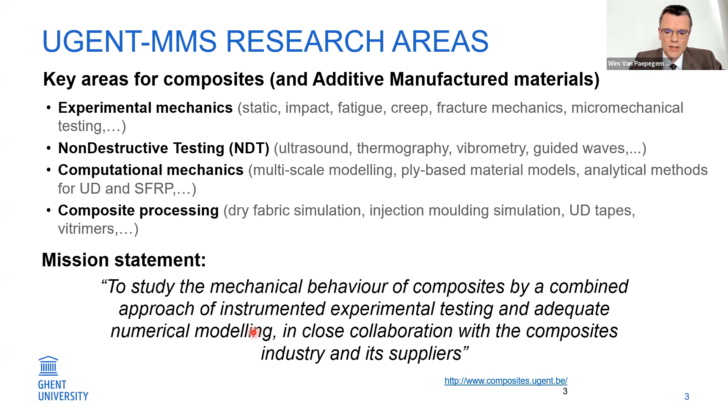So this was just a brief introduction, and now the outline of the webinar today.

First of all, I guess most of you are at least a little bit familiar with composites, so I will give you a short introduction about the multi-scale nature of composites and also their damage phenomena. Then I would like to take you through the story from two different angles, starting once from micro scale and bottom up, and then from macro scale or even structural scale and down. And every time have a bit the same structure: introduce concepts, show some results, and then a few experimental challenges that are linked to it.

Finally, maybe a bit provocative, I put a smiley here: unidirectional is still simple. I want to show you that if you move away from unidirectional composites, like in short fiber and textile composites, the geometry becomes more complex, and that can be an additional challenge if you want to model damage mechanisms.

So first, to start, composites are multi-scale materials. We all know they are made from dry fiber reinforcements combined typically with polymers - that's at least the majority of composite materials. Once it's cured or consolidated, it can look like this, a black plate, which in this case is carbon epoxy. And if you zoom in, we can see either individual layers.

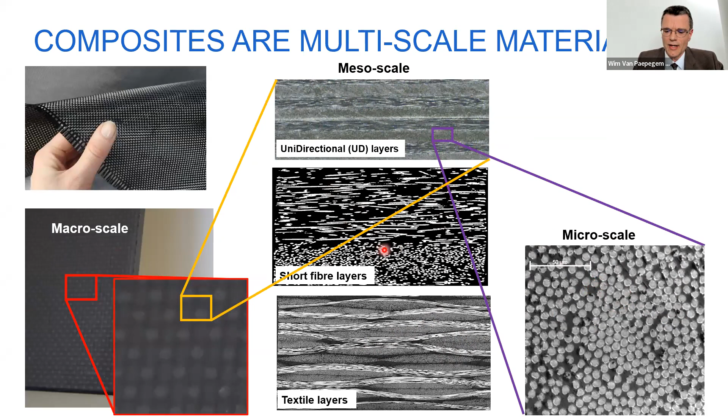Then if you zoom in here, or for example here in one bundle, you see the microscale with the individual fibers surrounded by polymer. So I will start once from here and once from there, and we will meet up here in my presentation.

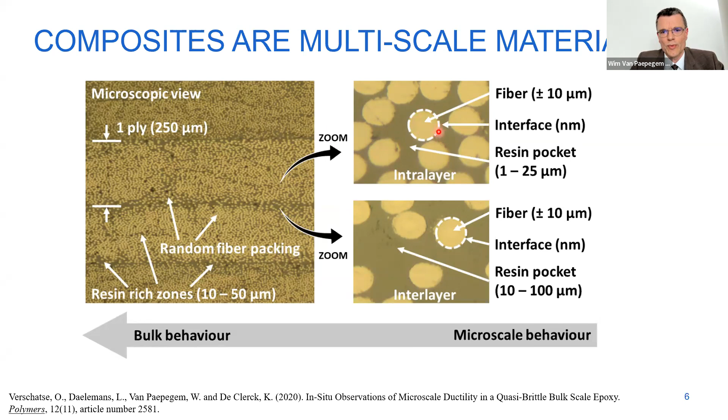First, just a few things more to give you orders of magnitude. If we have such different layers in a composite, one ply is typically a few hundred microns or even less if it's prepreg. If we zoom in, we indeed have these individual fibers, roughly 10 microns in average diameter, with polymer around it. And then this interface, which will also come back in my presentation, is a sort of nanometer-sized interface between the fiber and the polymer, which has to make sure that they adhere well together.

And about damage - this also has a multi-scale nature. Typically when you have transverse loading, in this case transverse tension, damage can start very early with disbonds in the fiber matrix interface. By the way, a beautiful picture from Olivier from our department, where you see the disbonds that then coalesce together. And if you zoom out, you start to see a ply crack.

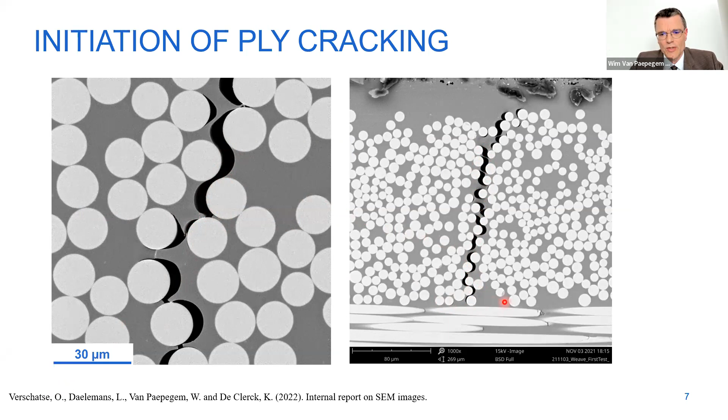And when that ply crack meets the boundary with a differently oriented layer, you might get delaminations. Here from Ilya Koch's group, you see a picture where at the crack tip, the crack deflects and you get a delamination. This can also happen at free edges, at rivet holes, or in adhesive joints - you can have these delaminations.

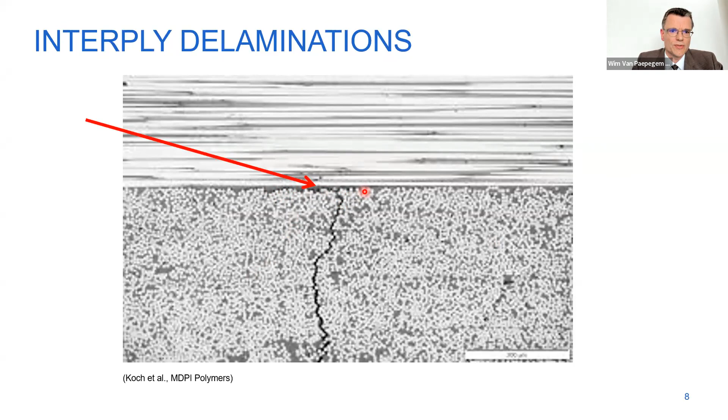Now I want to take you to two different routes, let's say. Here we have the zoomed out picture of a failed composite - these are stitched electron microscopy images together. And here you see a lot of damage and also final fiber failure. So we can start from this scale and go up, or, if we are more interested in structural behavior, we can start from this scale and try to introduce the damage.

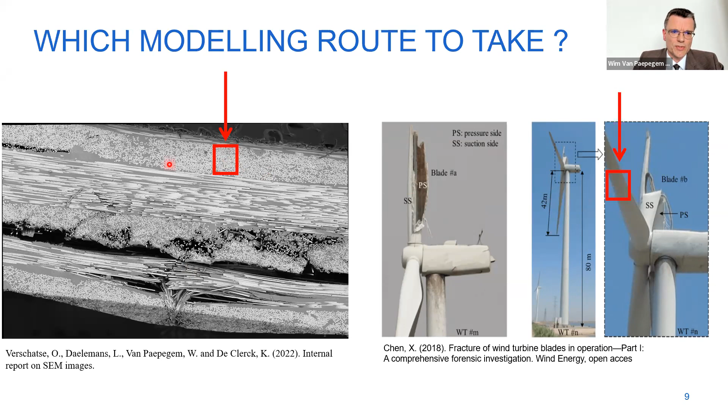And this is what I would like to take you to. We will start with this route, and then in the second part, we will start from this route. So first, starting from micro scale and introducing you to a few concepts before we go to the results.

First of all, if we start quite simple - what is our objective in micro scale modeling? We would like to start from the individual constituents, being the fiber and the polymer, and later also introduce the interface. In this case, we start just with elastic properties - the elastic properties of the fiber and the polymer. And here you can already notice that carbon fiber is not isotropic in stiffness, and the transverse stiffness is much lower.

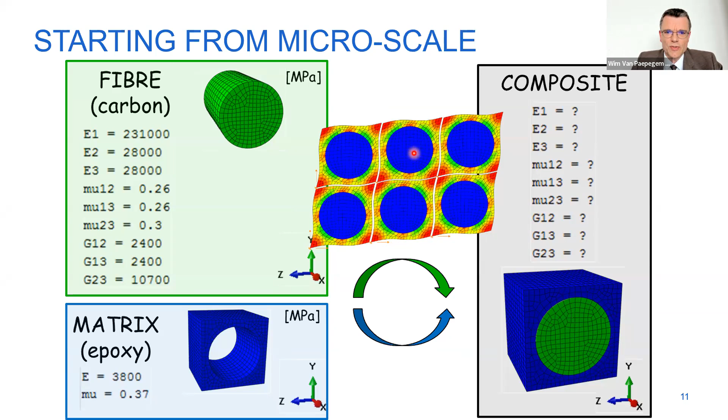We would like to predict the properties of the composite, which is the assembly of the fiber and the polymer. To do that, we don't want to simulate the whole composite. We want to simulate a unit cell and apply periodic boundary conditions so that we only simulate one building block. Because the boundaries are periodic, we can tile the whole structure and predict the overall response.

That's the idea. Of course, this so-called square packing is a bit too simple for reality, so this is sometimes just the start of the modeling. And if you want to debug your models, you can even have an alternative hexagonal packing just to see if they get the same results.

But then you move on to a random packing of fibers. Here you see again the periodic nature, so the fibers are assembled left and right, and you can get a full fiber again. More realistically, you generate a random packing which looks like a real microstructure, and again you apply the periodic boundary conditions.

I have to cut some corners in this short webinar, so simplified: state of the art in microscale simulation is typically done for these representative volume elements, mostly for thermoset composites—you don't find that many simulations for thermoplastic composites. If you apply transverse loading, what you typically see first is interface failure and also a high stress triaxiality in the matrix. And very important is also the stiffness contrast.

Your fibers are like very stiff and hard inclusions, almost obstructions or obstacles in your polymer, so they create stress concentrations, and the relative stiffness difference between the fiber and the polymer is important. Here you see carbon, glass, and steel fiber—the stiffness mismatch with the polymer, which is typically a few gigapascal, can be very different. Mostly we simulate static monotonic loading conditions, so that's a bit our starting point.

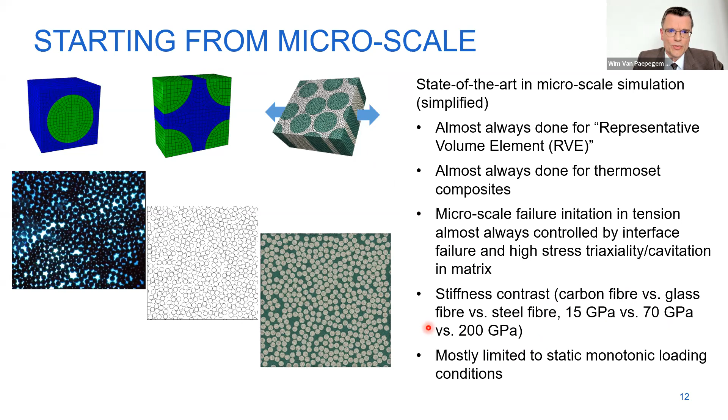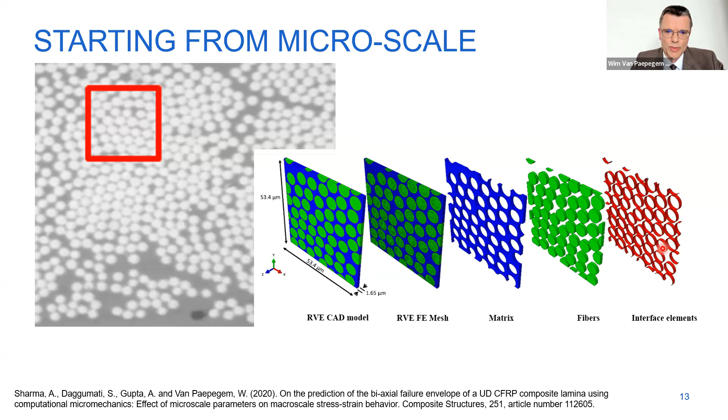We do need quite some ingredients just to look at a starting simulation. First of all, about geometry: we need to define a volume fraction consistent with the experiment. We have to decide about the local packing of fibers and also interfiber distance—the closer the fibers together, the higher the stress concentrations will be. And we need these periodic boundary conditions.

Here you see exemplified one instance of your representative volume element. Here is zoomed in the boundary of this representative volume element, and you see that it matches perfectly with the adjacent instances—so it's periodic. The fibers are typically assumed linear elastic because most of these simulations are done in transverse loading in this plane.

And then the interface, that becomes a bit problematic. We need to define an interface strength in mode 1 and mode 2. We also need to define a fracture toughness for crack propagation in that interface. And if the interface has failed and you apply, for example, compressive loading, we also need to define a contact condition, possibly with a friction coefficient.

And the same for the polymer—you have a lot of options: elastoplastic, or you can go for rate or time-dependent behavior with viscoelastoplastic behavior. You can have different behavior in tension and compression. You can add a damage model for cracking. And as I'll show you later, we can also add thermal properties to do thermal simulations.

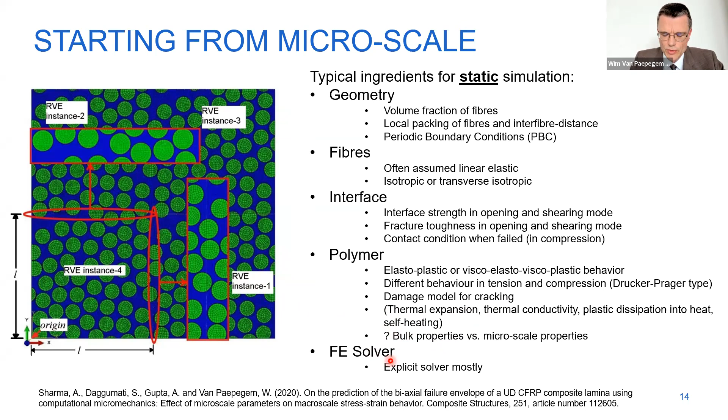Then there is another question, which I will also discuss in the experimental part: what about the properties? Do we take the bulk properties measured at coupon level, and are they the same as these tiny volumes here in between the fibers? The solver settings I will not discuss too much here—mostly we use an explicit solver because convergence is not that easy.

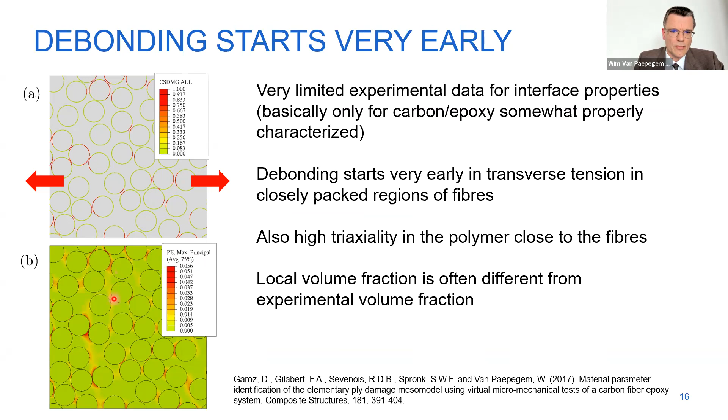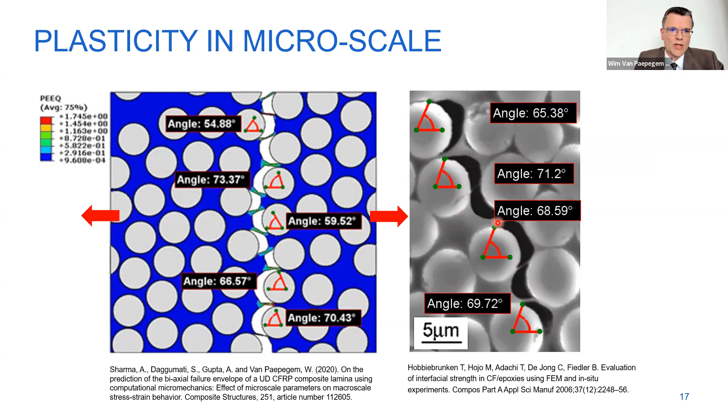When we zoom in more, when these debonds start to coalesce together, you also see a large plastic deformation in the polymer, and these fibrils of polymer stretch a lot. We try to validate not only on transverse strength, but also on opening angles of debonding, for example Hobbiebrunken's famous pictures showing these polymer fibrils that stretch. This seems like a lot of ductility, but this is not in contradiction with the brittle observation at structural scale or at coupon scale. You see here this plastic deformation.

What is the opening here? It's only a few microns, because the diameter of the fiber is roughly 10 microns. So at macroscopic scale, this is still very brittle. But we can confirm, indeed, from scanning electron microscope, here you see this was originally around the fiber, and also this part here around this fiber. So you do see a lot of plasticity.

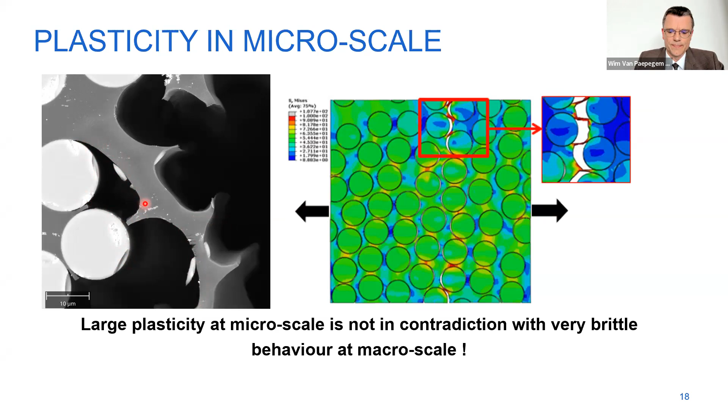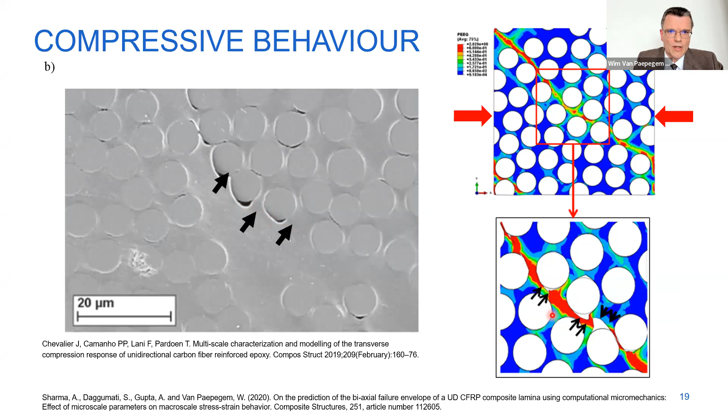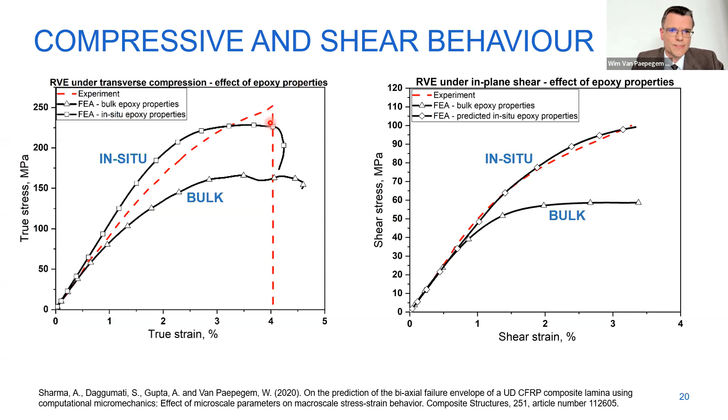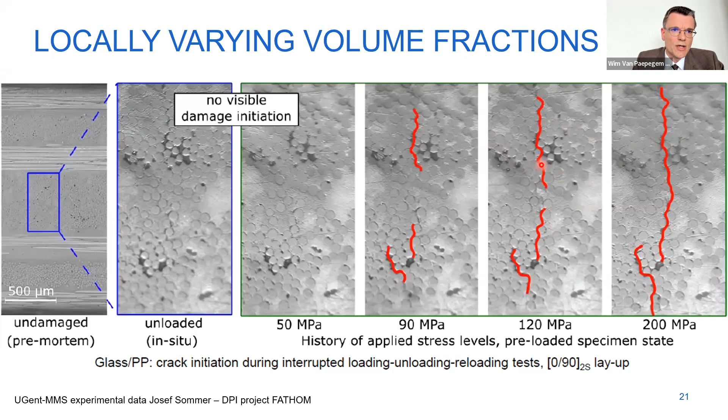But still a few more things about this microscale simulation, it's also about volume fraction. We assume a certain volume fraction in the representative volume element, but that is not always the local one which is driving the damage in reality. This can be the case for a perfect aerospace prepreg composite where the fibers are very uniformly distributed. But here you see a glass polypropylene thermoplastic composite, typically used for automotive applications, and you see that the fiber distribution in the thermoplastic tape is not so uniform. There, if we increase the loading from left to right in transverse tension, you see that the cracks typically develop in the highly packed regions where the local volume fraction is a lot higher than what you assumed maybe in your RVE.

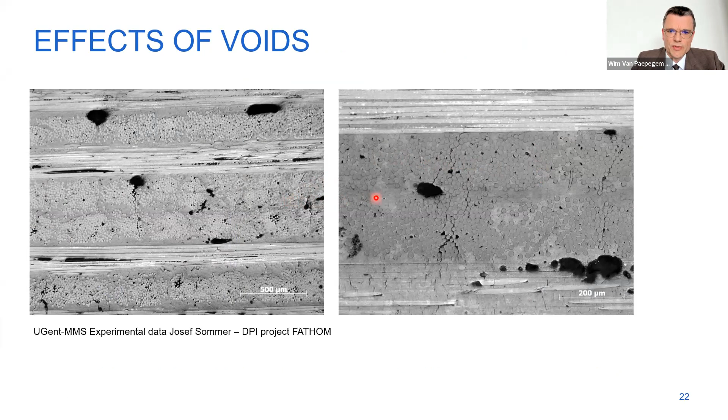And another thing is voids. Sometimes when we get industrially produced laminates with quite low consolidation pressure, you can also see voids in the laminate, and also these can sometimes be a start of cracks. Those you can also somehow include in your RVE by assuming a certain void content, and of course, obviously, these will often be an initiation site of damage and reduce also the transverse tensile strength.

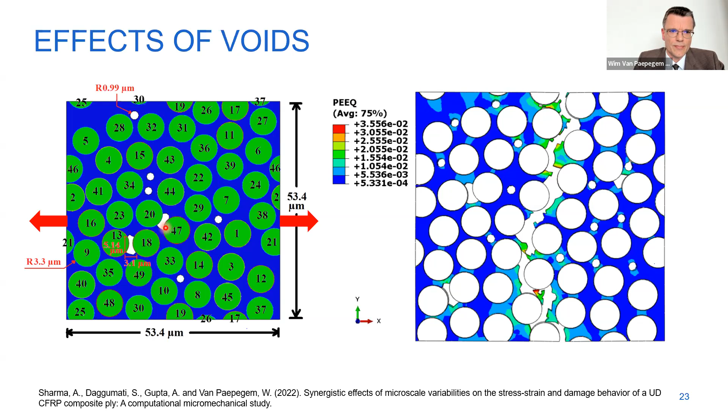And the last thing to mention about thermomechanical analysis: this is something we are recently doing, is not only applying periodicity in mechanical loads, but also having temperature included. In this way, we can start to look at other effects like self-heating.

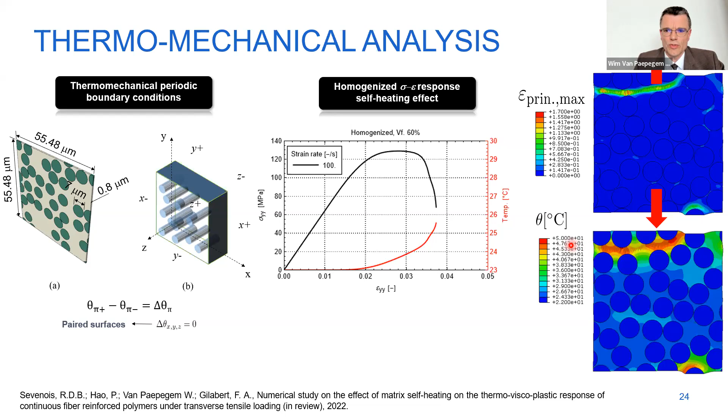So this is a self-sustaining effect. And then to conclude on this part, there are a lot of extensions possible. I retake my slide about the ingredients, and I added here, if you would move to fatigue or impact simulations, you come into quite some challenges. So what about the interface? How does it behave in fatigue, in impact? How strain rate dependent is it? How temperature dependent is it? You also need quite advanced models for your polymer, and you would also have to do progressive simulations in a finite element solver. So certainly not easy, and also certainly demanding or challenging for the experimental side.

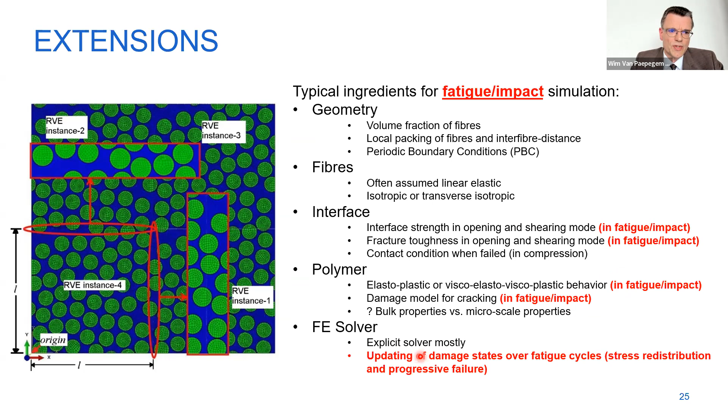This is where I want to still say a few words about the experimental challenges which are related to it.

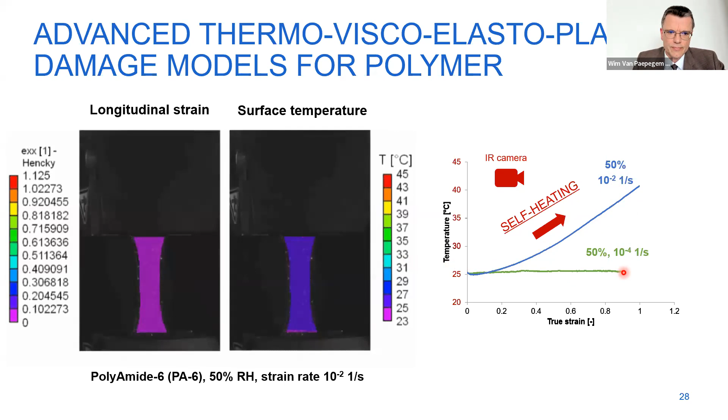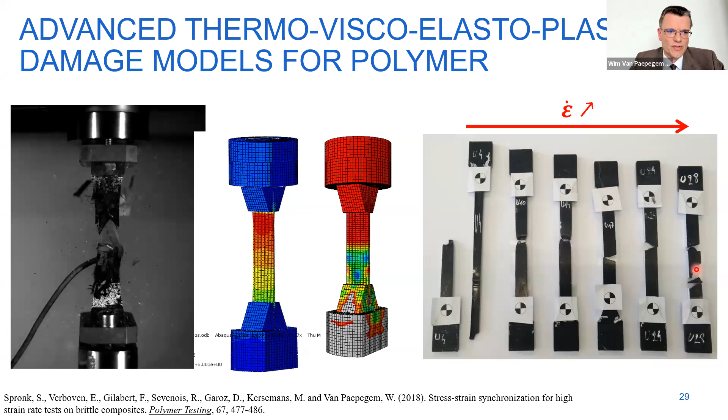Why is this all important? If you calibrate your polymer model for the micro scale, you should not introduce any fictitious effects in the polymer that are physically not there. And that I want to illustrate with this last slide on the micro scale.

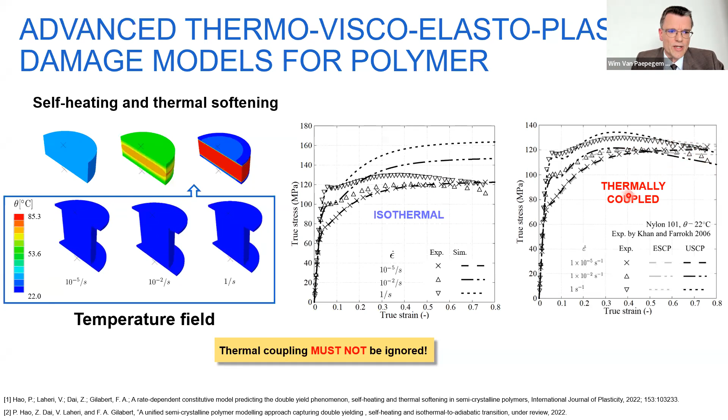That was a bit about the micro scale and all the ingredients and how to build these models and some points of attention. Now we move to the macro scale and come then way down again to the mesoscale and the ply scale. Again, first some concepts, then some results and some experimental challenges.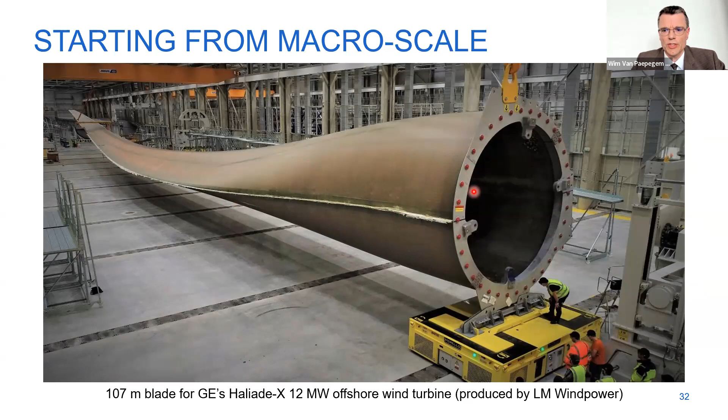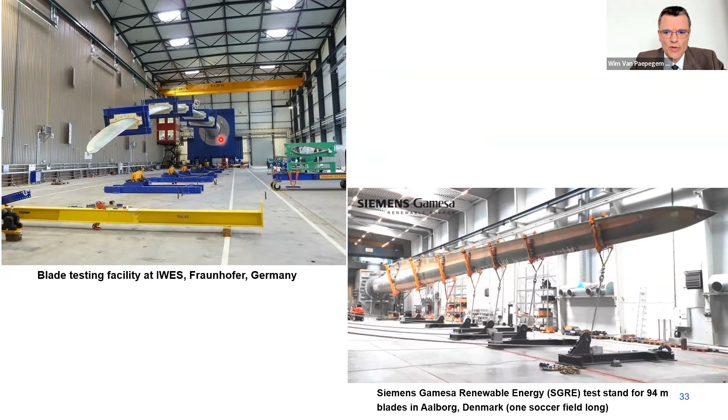These blades are tested in fatigue and also in static loading. Here you see a few pictures of certification tests where the blade is put under a certain angle, then pulled downward with different cables to the ground. This can happen in edgewise, flapwise bending, and coupled loading to also have torsion. You measure the reaction forces and moments, plus stroboscopic measurements of deflection, strain gauges, and so on.

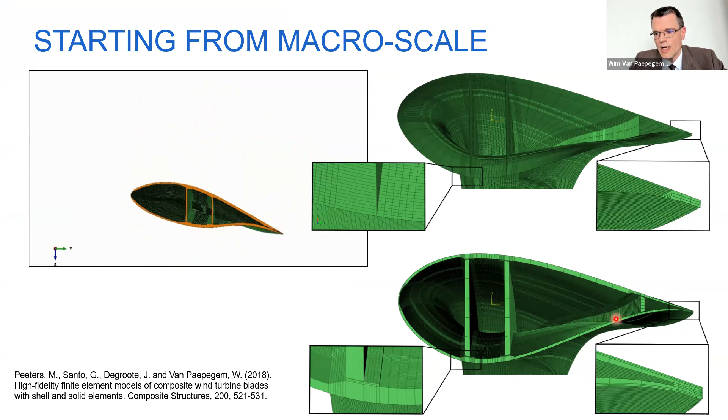For quite some years already, we work on developing meshing tools to have an automated model generation for these large blades. We can do that with pure shell elements, so this is a complete shell element mesh, except for the adhesive joint here. Or we can have a full solid mesh where the whole blade is meshed in solid elements, which are then multi-layer elements describing the stacking sequence. You see in detail the adhesive joint and also the connections of the shear webs to the airfoils.

All very nice, and we can do the same certification test that I just showed you before. We have some winches that pull the blade to the ground, and we can simulate that behavior.

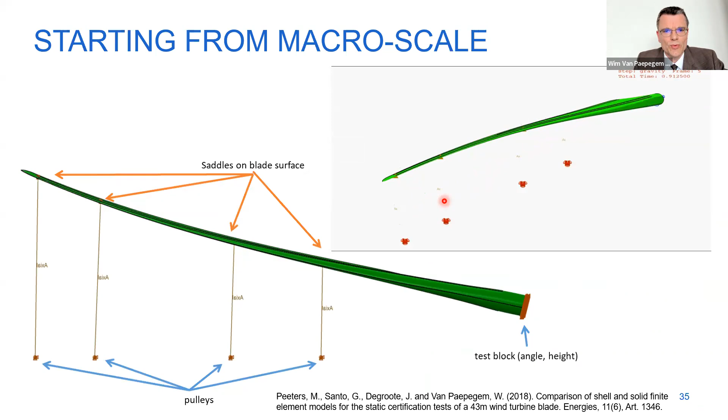But now back to our damage story. So here we have quite coarse meshing, let's say, compared to the damage mechanisms at micro scale and how to deal with them.

Schematically, we have our ply cracks. I showed you the delaminations from the crack tips. We can have fiber failure and how to represent that. We could opt for an approach where you homogenize the material in between, like we did in the micro scale, but still keep the individual ply cracks modeled and even delaminations. I hope you understand with me that this is still computationally impossible. So we make these models on a smaller scale to validate our models, but we don't proceed in this direction.

On the other hand, we went the direction of more analytical models with the variational approach, where you try to solve the system where you do have ply cracks, you do have delaminations at the ply crack tips, and you might have fiber breakage for a certain layout, and you try to solve this system without finite elements. I will show you in the next slide how we do this, but if you can do that, then you could say I homogenize these plies with their damages inside, and the stiffness tensor becomes a function of crack density, delamination lengths, and fiber breakage volume.

This is, of course, in the assumption that you stay with physics-based damage models and that you try to keep a link with physical representations of damage.

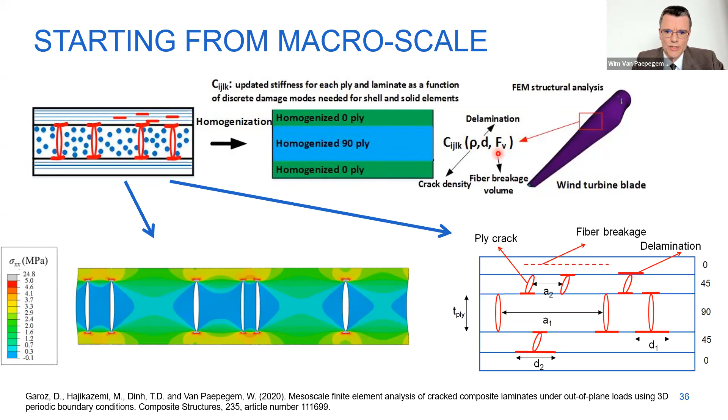Now, what about these models here? So some results to show you our philosophy in this approach. Mohammad Hajikazemi, one of our senior postdoc researchers, has worked a lot on this in the past years. The setup is like this: you define a laminate where you have a certain array of ply cracks or even ply cracks with delaminations at the ply crack tips. You have the typical loadings that you also are used to in classical laminate plate theory, so in-plane loadings, shear loadings, bending loadings, and we also added out-of-plane traction.

And now we want to solve this without finite elements. You could argue, yeah, this is practically impossible. Well, it is indeed not easy. I mean, you get complicated equations, but to give you a hint how it works, you start with your solution from classical laminate plate theory, as if the material was undamaged. And then every crack is, put it a bit simplified, like a stress boundary condition.

So we assume the crack faces are open, and then it means that on the crack faces, the normal and shear stresses are zero. This is like a boundary condition, an additional boundary condition for your problem. If we do this for all of them and we properly separate the domains, you can solve this and have access not only to the global behavior, but also to the local behavior, so we also have the local stresses.

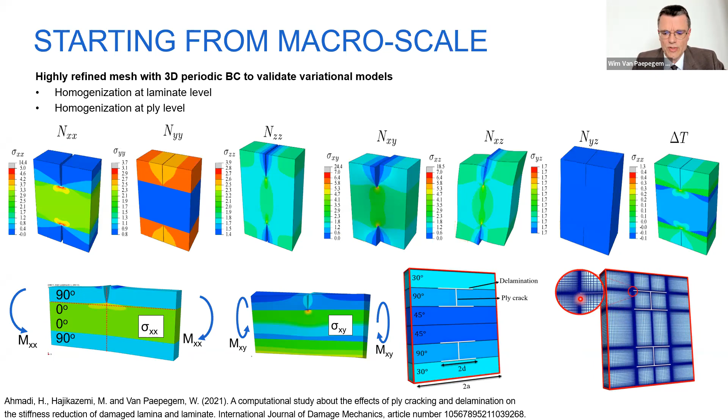Why do we need these short runtimes? Because there is still one thing missing: how will one scenario evolve to the other one?

So here I have an example. I have 3 ply cracks. Suppose this is my current condition. What will happen next? Is the next scenario another ply crack here in the middle? Is it maybe delamination from the ply crack tips? Is it maybe fiber failure, which is happening here? Or maybe it's all 3 of them together.

And how do we decide on that with an energy-based approach? We will calculate all these scenarios and keep the one which is energetically most favorable. That is why the calculation time must be so short, because we have to assess the different scenarios and keep the physically most relevant one.

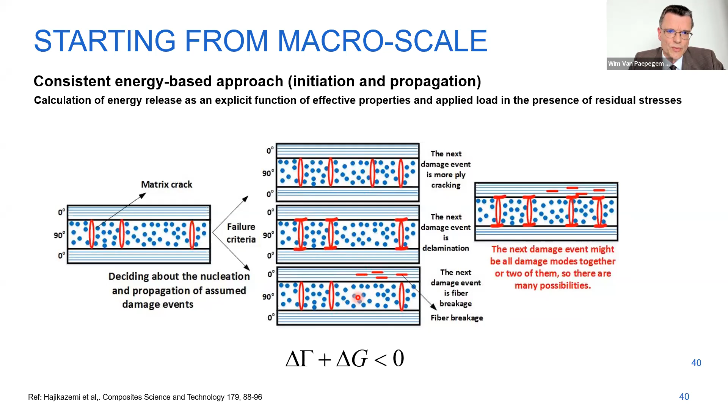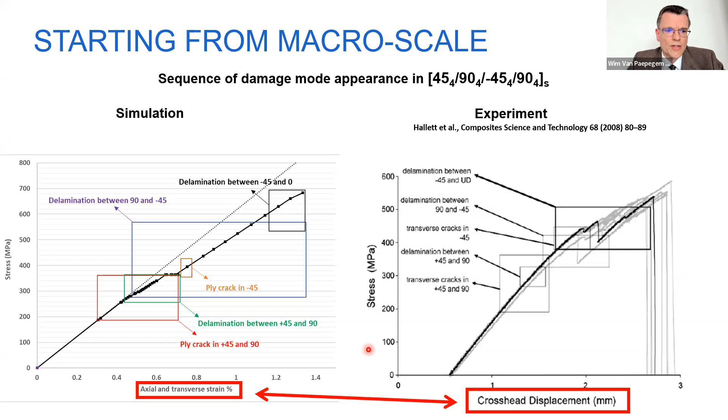So to combine this damage-based and physics-based modeling with validation experiments, you also need a lot from the experiment. You need good observations of ply cracking, delaminations, and to do that online is really not easy. So this brings me back to my last section, like with the micro scale, the experimental challenges: how can we get more from one experiment to support these modeling efforts?

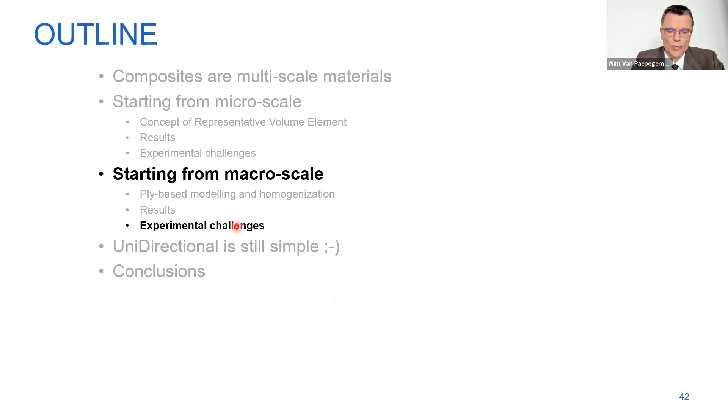Here you see a picture of a typical experiment in our lab. So here you have the sample, which is clamped. And here you see the infrared camera, remember the temperature measurements I showed you before. And here you see 2 cameras, which are measuring in a contactless, optical way the strain on the surface. This is with digital image correlation.

For those who would not know it, you apply a speckle pattern on the surface, and follow it with the 2 cameras. From that, by correlating successive images, you get the strain in a contactless way mapped on the surface. You also see some illumination and some other things.

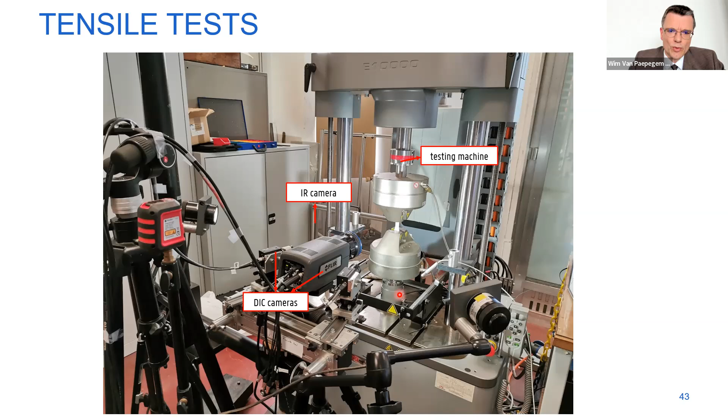But what did we try in the past few years? This is looking at the front surface with 2 cameras. So if you first look to the left to the schematic figure here, we already have the speckle pattern on the front surface where we look at with 2 cameras. And now we add a speckle pattern at the edge, and we also look with 2 cameras to it.

And we have an extensometer, which is just a validation for the strain measurement in axial direction. We always do that as just a backup. These are all synchronized. All these measurements are synchronized with force, displacement, thermocouples, and so on.

And here you see what we see with the cameras. So this is the frontal DIC pattern, which is basically the green arrows here, which you do not see here from the edge. And these are the edge patterns that the 2 cameras from the side see.

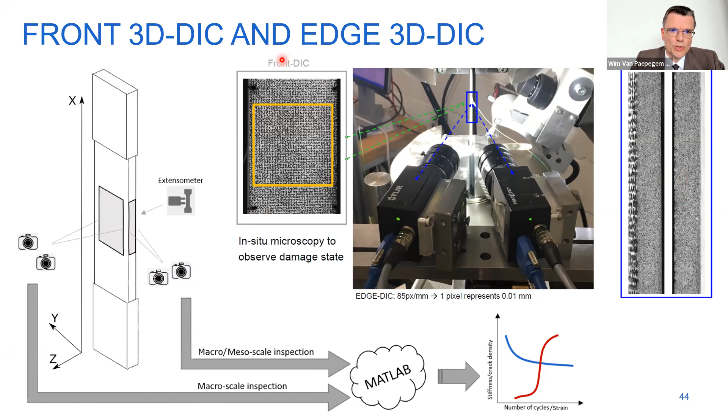And what can we get out of these measurements? First of all, I will show you the front DIC. This is still, let's say, more standard. And I will show it to you in fatigue. The reason why I show it in fatigue and not in a static loading is to show you also a bit the power of this method, because in fatigue you can really extract a lot of data from this.

So here you have 2 experiments, experiment 1 and 2, where for both of them I show you the longitudinal or axial strain, and the transverse strain.

Be careful, this is a logarithmic scale, so this is the running-in of the machine that you see. Then when the machine ramps to the final amplitude, the fatigue test continues and you see a slight increase in the longitudinal strain.

On the right, you see basically more or less the same information, but combined with the load cell data. So here we have the stress-strain hysteresis loops, on this side for the axial strain, and on this side for the transversal strain. Again logarithmic scale, and blue is the first cycle, red is the last cycle before failure.

You see that the hysteresis loops shift from left to right, and here from right to left for transverse strain. So with many data points for an individual cycle, you can really measure the energy loss in one cycle and also look at permanent deformation over time. That was the frontal DIC.

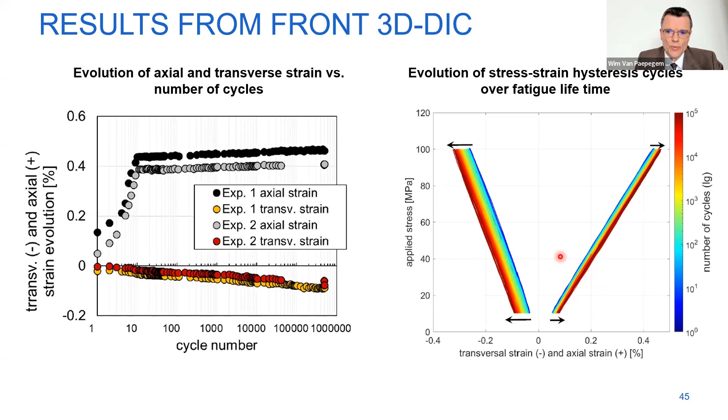If you now go to the edge DIC, we can do even more extraction of data. So here you see the images taken from the edge, and we show the axial displacement. You see there are a lot of jumps or discontinuities, and every one of these discontinuities is a crack, because when you have a crack oriented like this in the 90-degree ply, the displacement field is not continuous across the crack faces.

And you get a jump there. So if we now draw a line here and plot it in a graph, it looks like this. This is the axial displacement versus axial position, and every tiny jump here is a crack. So all the green lines are detected cracks.

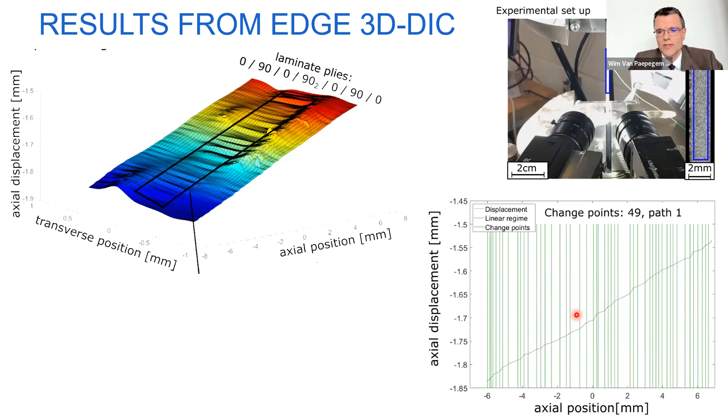This is very nice because if you let your fatigue test run for a week and your system is there, you can measure day and night and get a crack density versus the number of cycles. You see for different layups, the crack density growing over time, and also, like we know for fatigue, at some point saturating to a certain value.

Because you have the stress-strain curve in the axial direction as well, you can also show the stiffness degradation versus the crack density. And then we are there, because this is physics-based, a relation between the damage at micro scale and the stiffness, which is a structural macroscopic property.

And we can do even more. Here you see, again, our variational model can show the relation between the crack density and all the stiffnesses. You see that if you have cracks in a 90-degree ply, some stiffnesses stay the same, but others, especially the transverse stiffness, the shear and transverse shear, drop a lot.

The nice thing here is, and we use that a lot, that you do not even need a damage model in fatigue to get the evolution of damage. You can just freeze the damage state at a given moment in time, count the number of cracks, get a certain crack density and stiffness reduction for that crack density, and then check with your variational model if that crack density and that stiffness reduction match.

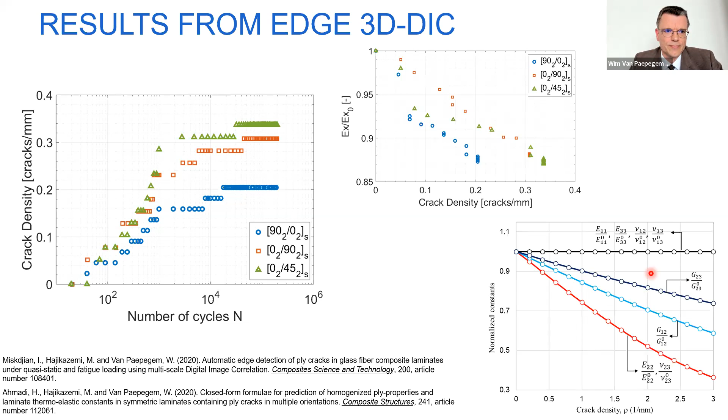And finally, again, validation. Do we trust this? So after a fatigue test, we do not run till final failure, we stop before. Then under the microscope, Joseph in this case is the victim who manually measures all the cracks and compares the crack density with the one measured from the digital image correlation. This way we get another verification that this works.

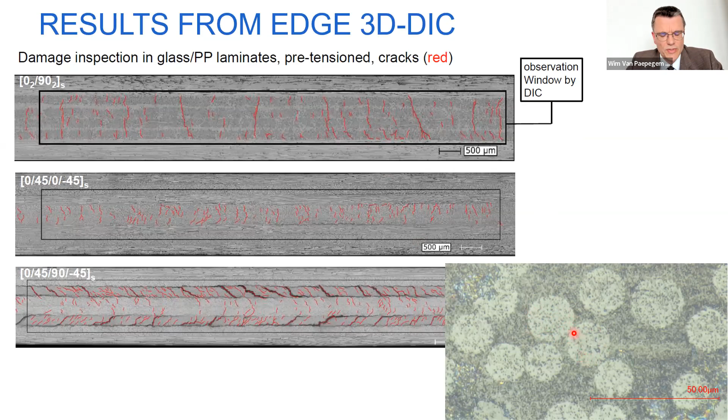And now we are even trying to get nanospeckle applications. So in the background, you see the individual glass fibers, and the speckle pattern is on top to get even higher resolution in measurements.

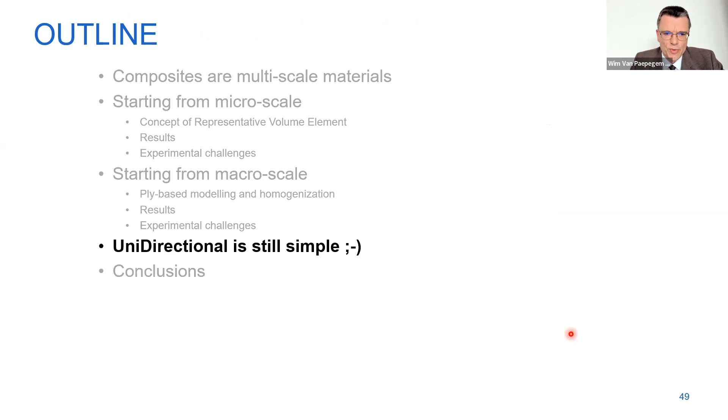And then I promised the last 5 minutes, unidirectional is still simple. I just want to give you a peek view, I can tell the same story for textile composites where we are also working, but I will just limit it to short fiber.

There, the geometries are much more complex. Typically you use injection molding in automotive and you get quite complex parts with sharp corners, a lot of variations in wall thickness and geometry. So there, typically mean field homogenization approaches are used, like for example in the commercial code Digimat.

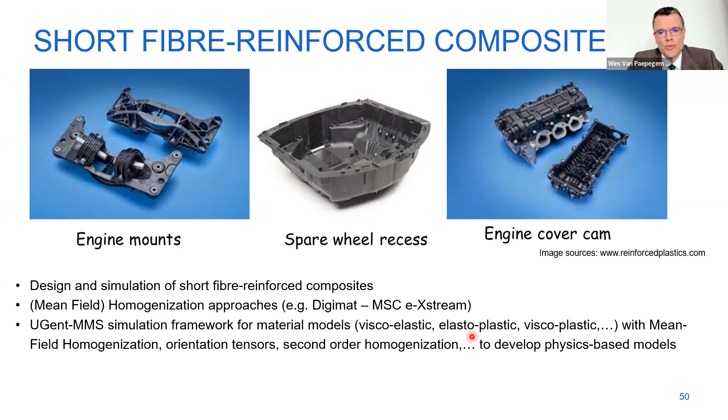What we can already recycle are our polymer models. All the nonlinearities of the polymer that we had for the micro scale of the unidirectional composite, we can still use. But we get other complexities on top of that, and that's what I want to show you in the last minutes.

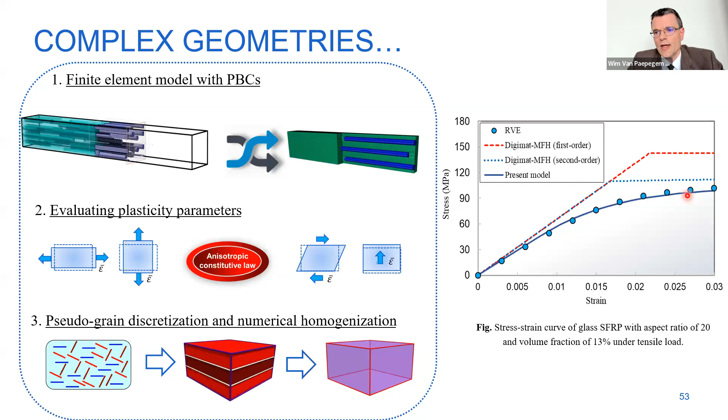Here you see that this can work. This is the stress strain curve: the circles are the finite element simulation of this RVE, and the fitted line, still a fitted curve in this case, is the anisotropic plasticity model. We then use this with different orientations and build in the orientation tensor from these sides.

To conclude my story, you always see my logic with the simulations and then the experimental challenges. Just a few last ones to close the story, experimental challenges, and I want to show you one very down to earth.

You want to have this sample, 1 millimeter, 3 millimeter high, to look at these fiber orientations. I showed you the fibers are more or less 90 in the middle, and here more or less aligned, and we would like to segment the individual fibers. That means in a micro CT scan you need a very low voxel size, but that also means you need a very small sample. Now if you don't want to lose your hands or thumbs in the diamond saw, cutting these samples is already a nightmare, because in this case it was thermoplastic, so the heating introduced by cutting should be minimized.

But now we managed to make very small samples here. For those in Europe, you'll recognize the 20 euro cent coin; for others, you'll have to believe me this is about 1 millimeter size, and this is a small coin in euros. Then we can do a CT scan, and by deep learning algorithms, we can segment the individual fibers and get some statistics on them.

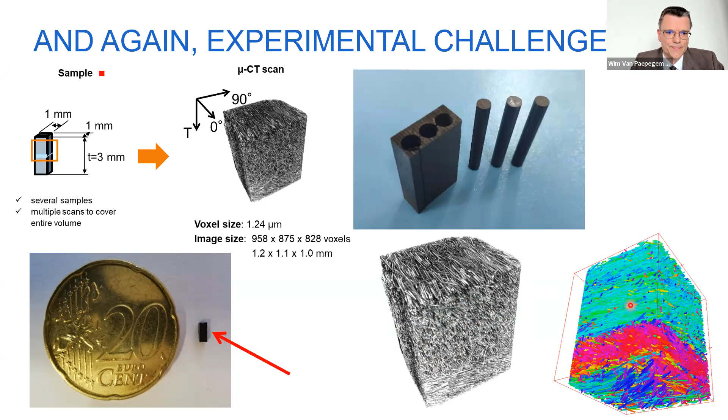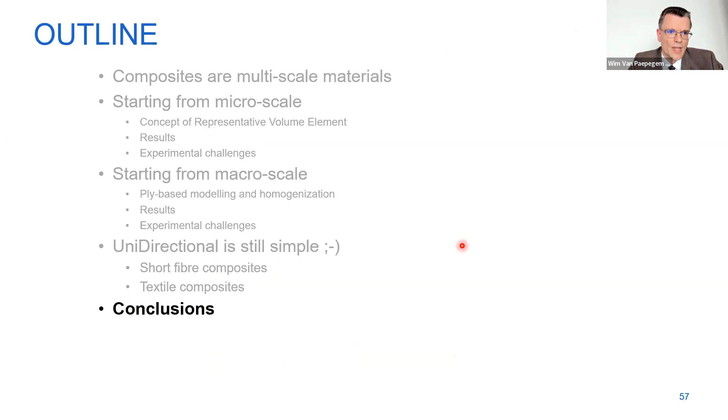I'm at the end of my presentation, so in conclusion, for the sake of time, I will not repeat all of it. I hope I brought through the message, which is a very important one in my own belief in modeling composites: that a numerical and experimental integrated approach is really key.

Of course, many things were still not highlighted here in this short webinar. But I invite you, we recently edited a book with many colleagues in the field on continuum mechanics modeling, which is from end of 2020, so it's still very relevant as a book. And here is my email address if you would have any questions.

I will not serve as your personal hotline for problems in composites, but feel free, if you still have any questions after this one hour, I'm happy to answer. With this, I can acknowledge the support of all people in our group, of funding organizations, and industrial and academic partners we work with. And I'm very happy to listen to your questions. Thank you very much.

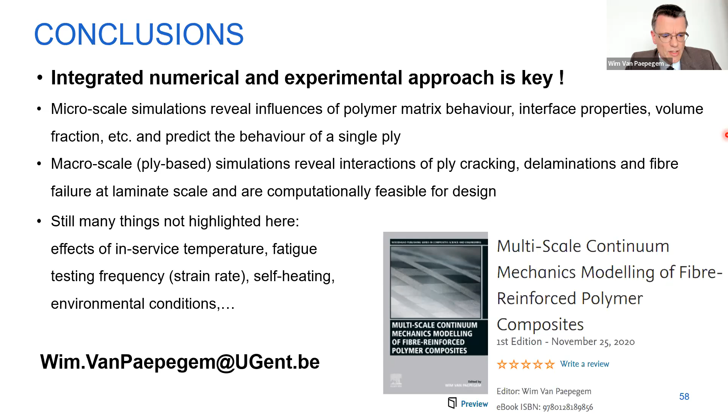Yes, thank you. Let me say a bit about how we look at this for the moment. We think from structural scale down to ply scale, we are already quite close to really physics-based modeling. We are already integrating quite some damage mechanisms in a correct way, and the delaminations is very recent. This was really a challenge to include those.

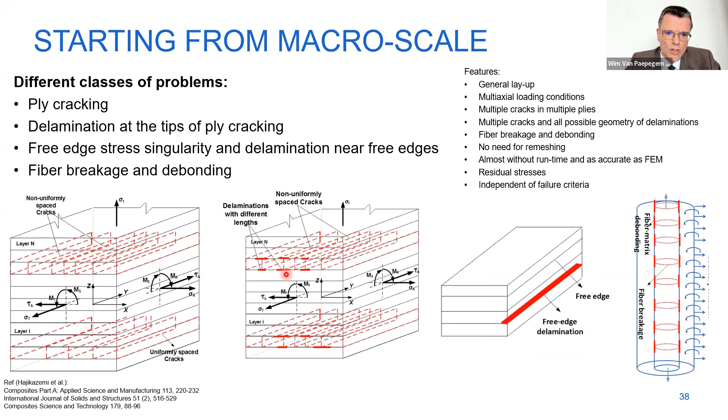Up till the ply scale, we are quite far along. Let me also show you something else, because this is very important related to your question. For example, even if you stay at ply scale, this is for us also an important check: can you model with your damage model these 3 layups? You see from classical laminate plate theory, they are identical, but once there is damage, they are far from identical.

Here the 90-degree ply is constrained, here it's at the surface, and here it's much thicker, so the damage will be different. The free edge delaminations have even different signs. So this is a very powerful validation, which continuum damage mechanics models can often not take into account. So that's the first part of the answer.

About the micro scale, honestly, we see it more as getting insight into the behavior of a composite rather than trying immediately to calibrate ply-based models. The reason is that I showed you some insights into the self-heating problem. We are currently also working on this, because the self-heating was still at ambient temperature - the temperature was not changing, it was just the internal temperature which changed.

But we are also working on projects, especially for automotive, where thermomechanical behavior is important, where also the ambient temperature is changing and crossing the glass transition temperature, and you get a lot of nonlinearities. And trying to really have an exact prediction from the micro scale up, we still struggle mostly with the interface.

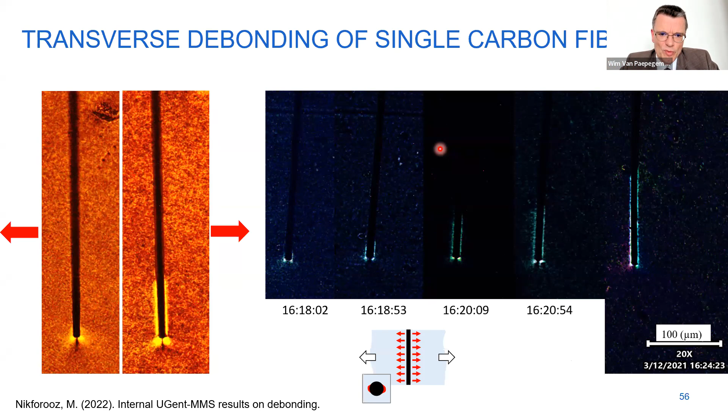Yeah, it's again a bit related to the interface. So I will go back to this slide here. This is now a single fiber in a polymer, and we can have well-controlled testing conditions. But for example, if you want to follow how these damage mechanisms evolve over time, this is also post-mortem after failure. There are some experiments in synchrotron, where people go to synchrotron here in Europe. You have the one in Grenoble, in Zurich.

But what I would really hope for, though I think it's technically very hard, is to get such things more to the lab environment, that you could follow damage mechanisms over time in real time, not post-mortem, because our mechanisms that I showed you for ply cracking are observed from the edge of the sample, not in the volume.

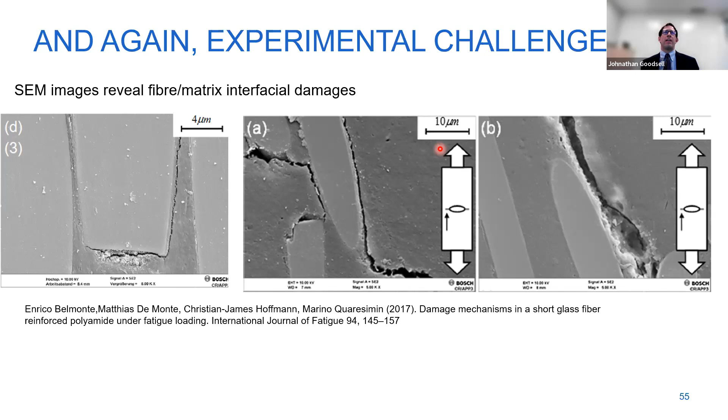Thank you. Let me ask another question that came up as you were looking at the 0-90-90 example, talking about the free edge stresses. Today, what's the state of the art as far as being able to model the effect of free edge stresses? What can be done analytically and computationally today?

Yeah, so that's something we could solve with variational methods. The free edge delamination—you probably know, not even delamination, but just the stresses elastically—if you want to do this in finite elements, you need an extremely fine mesh, and basically in the end it's a kind of singularity. So you have a problem that runs for a very long time.

So with variational models, we can have the free edge stresses calculated. Honestly, to what extent industry is already including this, I have rather the impression that as academics we have the role to, for example, compare different layups. And of course, now I only show two orientations, but if you have a complex layup with tens of layers, we can in an analytical way very fast give recommendations on which order, which sequence of these different angles gives lower or higher interlaminar stresses, just elastically.

And I guess for industry this is about as far as we can go for the moment, because really integrating interlaminar stresses like around every bolted or riveted hole in a default analysis, I think it's not so easy—at least in certain industries this is not common. But to give recommendations more on the design level, this is certainly possible.